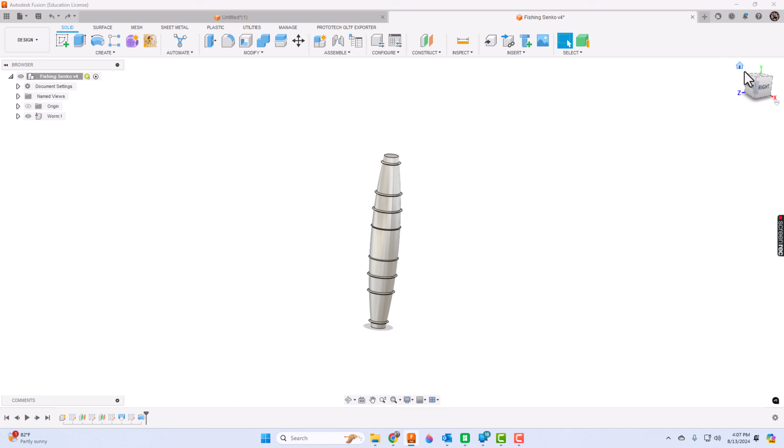In our video, we're going to create a mold so that we can make these fishing Senkos we've designed.

Step one is to take the part we've designed and make sure it is a component. Sometimes when we do a one-off design, we end up with bodies, even though that's not best practice. So we right-click on the body and say make into a component. That step is already done here.

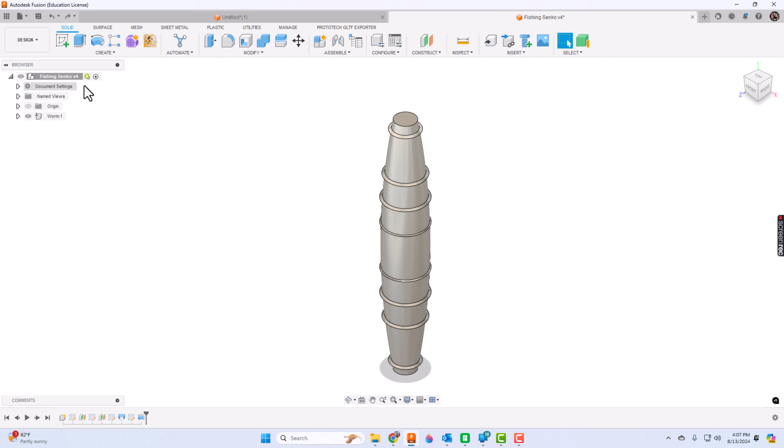Next, we're going to make the mold itself. We'll go up to New Component, and for the name we'll call this one the mold.

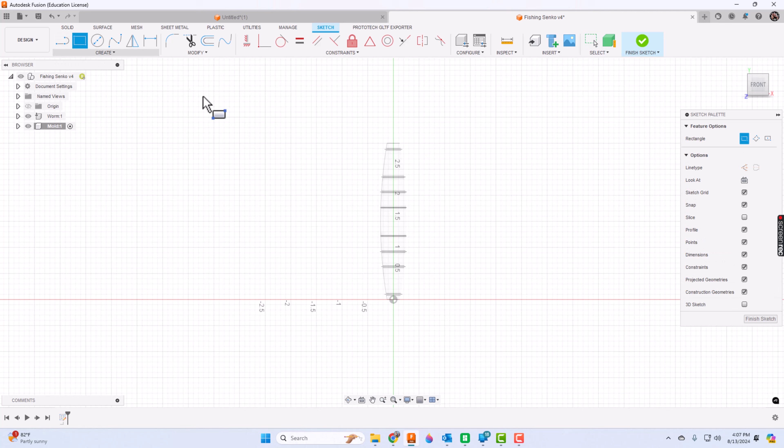We'll start with a new sketch, and click any plane that bisects the object—either of these two will work. I'm going to draw a rectangle around it, remembering to leave space down at the bottom as well. I don't want that worm to be on the very bottom, or the injection will go straight through.

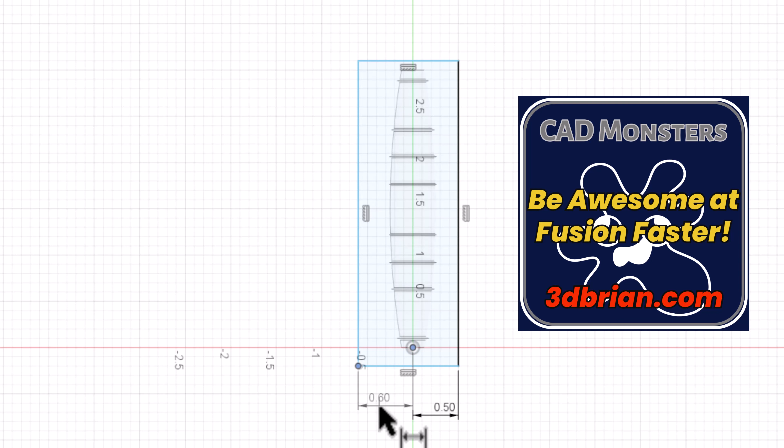Now we'll dimension some things. From the origin out, let's make that 0.5. That looks great, do the same thing to the other side, another 0.5. We'll also go from the origin to the bottom line, keeping it simple at 0.2. From the top to the top of the Senko, let's make it 0.125, giving it a little bit of space there.

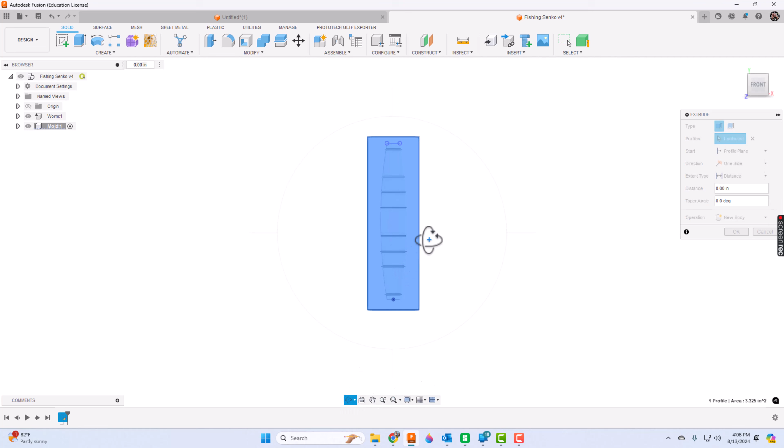We'll go ahead and finish that sketch. Now we'll extrude it. Let me rotate that so you can see it. We'd like for that extrusion to go to both sides, but notice when I do this it only goes to one side. Over here for direction, we can change to symmetric. Now it's going to be a half inch on each side, and we'll choose OK.

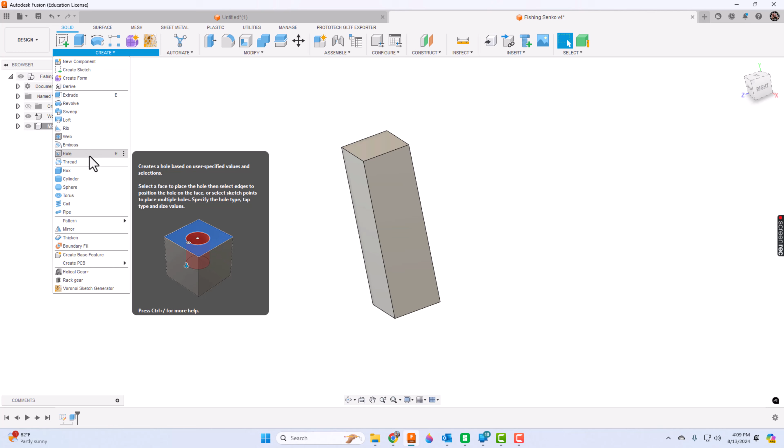It's important that we put a hole so we can actually introduce our material substance into it. We'll go up to sketch, or we can just do a hole from the create menu. There's hole, and I'll put it right up top here. Let me turn that so we can see it better. I'll just kind of put that in the middle.

For my diameter, it's going to depend largely on what it is you're going to enter the substance with. For me, I'll keep it like a quarter inch. And for the depth, I think we can just go with 0.125, and press OK.

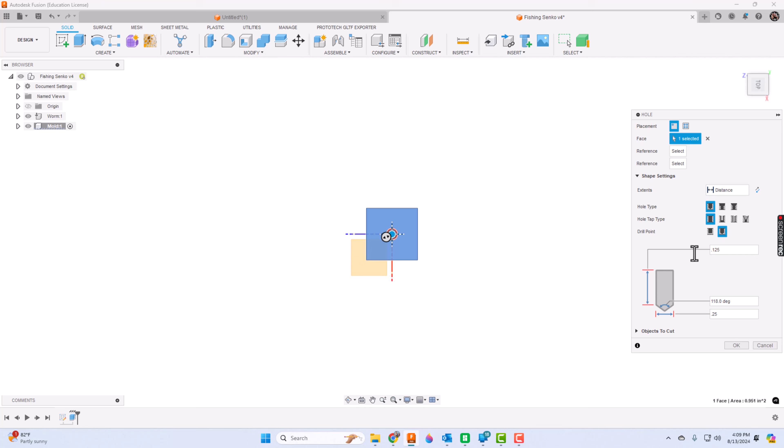Now that we've put the hole in, we've got to actually combine the worm and the mold and subtract the worm. This is how that's done. We'll go up to Modify and choose Combine. I'm going to say for target body, I'm just going to click the mold itself.

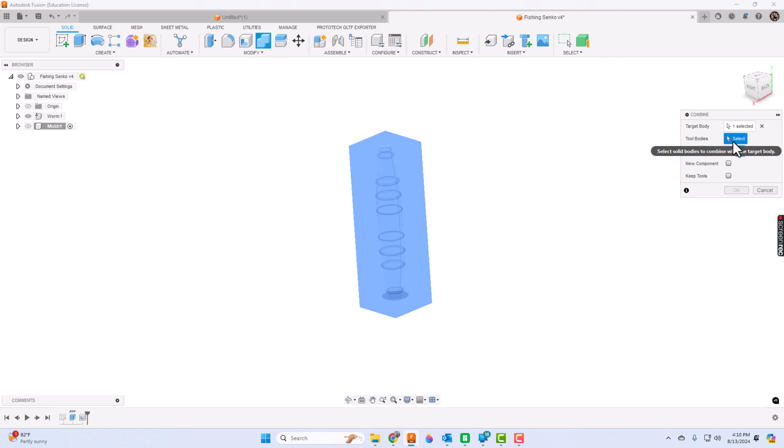Now I need to turn the visibility off in the browser, so I'll turn that mold visibility off. For my tool body, I'm going to choose the worm. I want to make sure my operation is set to cut, and I can choose OK. If we want to keep it, we can just say Keep Tools. We're trying to create a cavity here, so I'm just going to let it be.

And I'll choose OK. Now, I know everything just disappeared, but remember, we cut the worm out, and we turned the visibility of the mold off. So we're going to turn the visibility of the mold back on, which we just did.

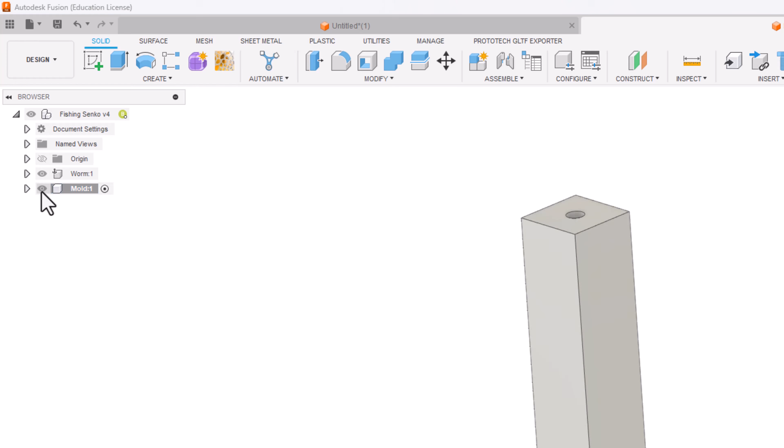Now we're going to expand the origin and turn the visibility of that origin back on. In particular, what I like is we want to pick a plane that bisects that.

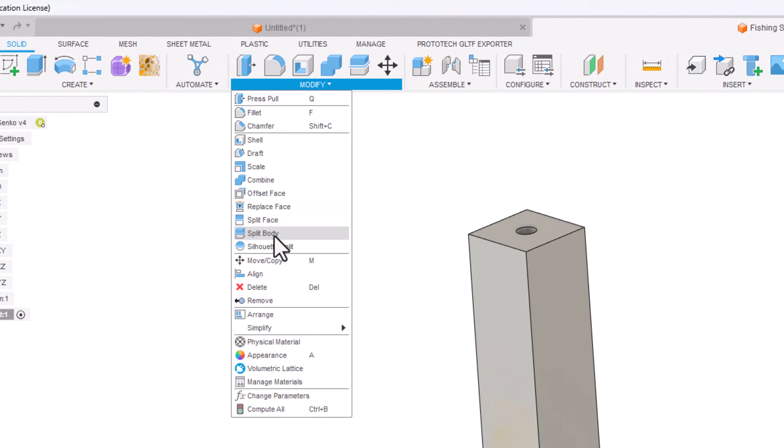The next step is to actually split the body. We're going to go to Modify and choose Split Body. Here it is—the body to split is going to actually be the mold. For the splitting tool, we're going to pick one of those planes that bisects it.

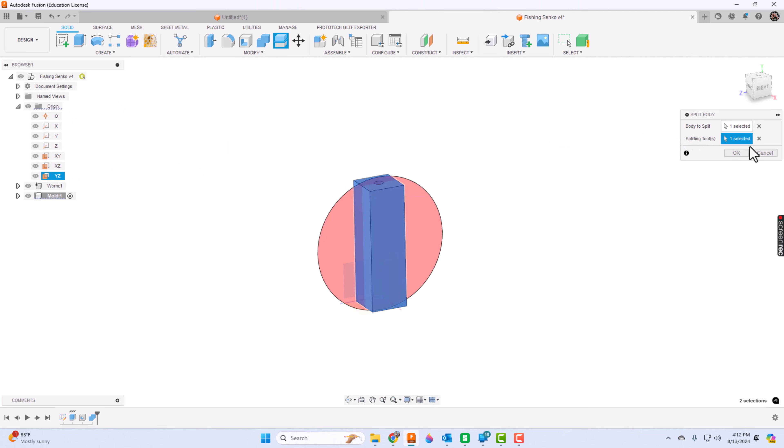Really hard to see, but if I zoom in some or zoom out, there's one. So that's my splitting tool, is the plane—that's why I wanted to turn those visibilities back on. And I'll choose OK. So now these are actually split, but right now they're still considered bodies.

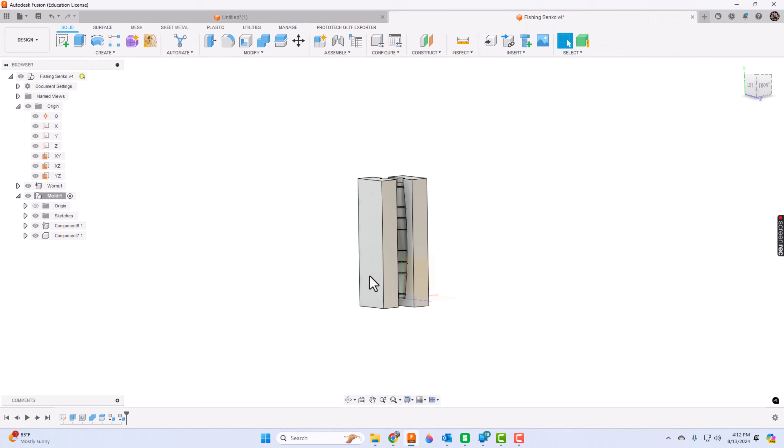So we'll expand the mold, expand the bodies, right-click on Body 1 and say Create Components from Bodies. We'll right-click on Body 2 and do the same, Create Components from Bodies. Now we can actually pull these apart, and you can see that we have molds, and we can use those in 3D print or export for your form of manufacturing.